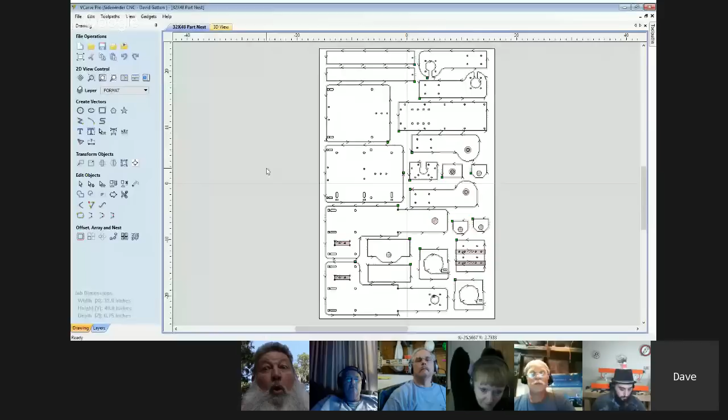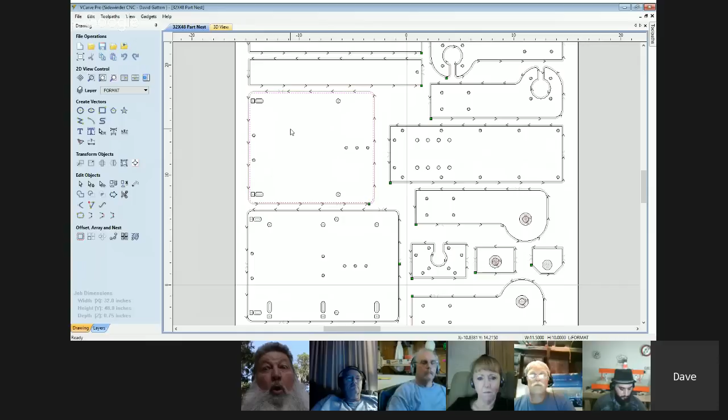This is kind of what I'm talking about. If I can just zoom in here. When something's joined, like if I click on this line, you can see how the whole outside perimeter is highlighted. And if you bring something in here and it's not joined, you'll only get whichever line you're touching on, or maybe just that arc or something like that. So if you're having problems running something and it's cutting on the inside in some places and the outside in other places, more than likely that's what it is. It just hasn't been joined.

Yeah, if I may piggyback on that too, Dave. 99 times out of 100, when you import a DXF file into VCarve Pro, if you import just a rectangle, it's 4 separate lines. It's not a solid rectangle. So you will have to highlight all 4 of those and join them, as Dave was talking about.

Sometimes, not often, but sometimes even circles will be composed of different segments, and you'll have to highlight that entire circle and join it, or convert it to arcs, and that gets a little bit more advanced. But just know that they're treated as separate lines, separate entities, and it's not one solid object.

Exactly. Yeah, I know. Because I draw everything in SolidWorks, and I've trained myself. That's the first thing I do when I bring the DXF into VCarve Pro, is to go through and join everything that I need to join, because it just won't work if you don't.

So. Well, is there a command in there, like that circle is separate arcs, and you highlight the whole circle, or select it, and there's a particular command, like say join, and it joins it at one time? Yeah. Exactly. You guys keep talking, and I'm going to go back here and try to find a DXF that I can bring in. Yeah, it's exactly like that, Russ.

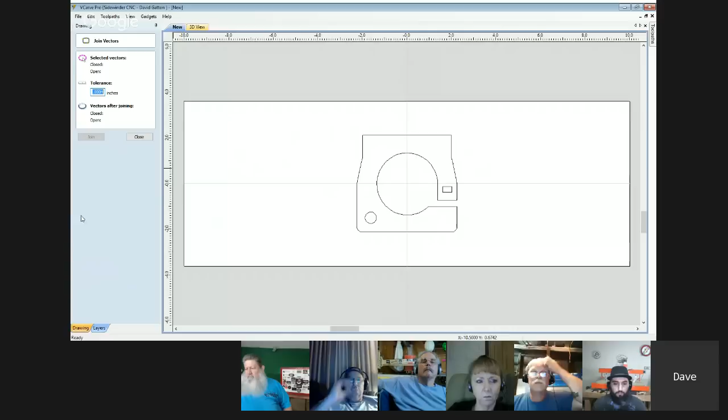And in this case, well, that one's okay. But in this case, you know, it's where I could just click this join thing and just box the whole thing. And then once I hit join, now when I touch any place on that part, the whole thing lights up. But that's what it needs to be in order to put the proper tool path on there. Otherwise, you're going to have some big problems.

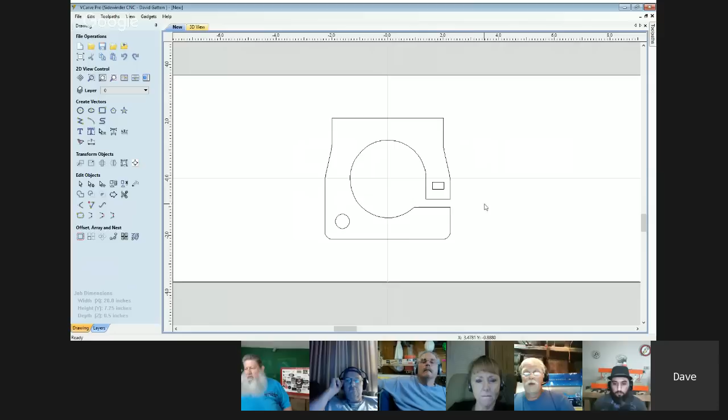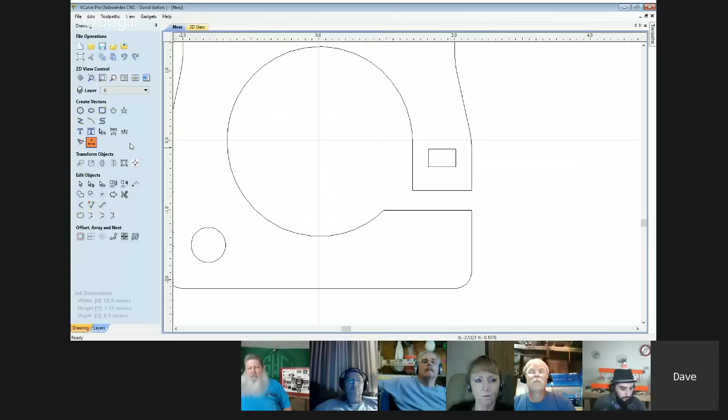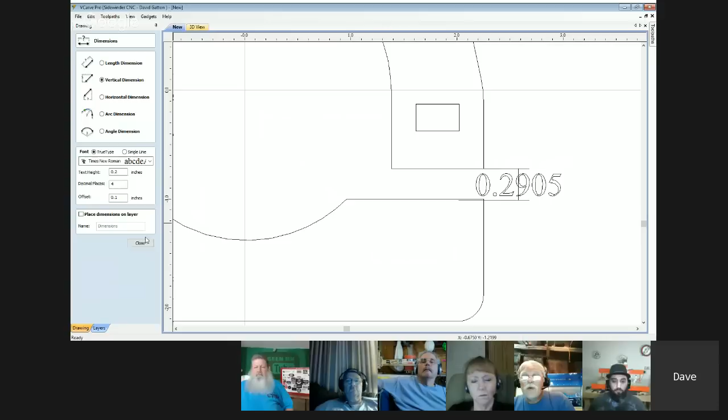And one other thing I might mention, since I brought this part up, is if you're going to cut with a 1/4 inch end mill, this right here needs to be, it doesn't have to be much, only a hair, but it needs to be slightly bigger than a 1/4, or you're going to have some problems there too. I know I've got that set at about 290 or something like that. But if you keep that the same, you run into problems.

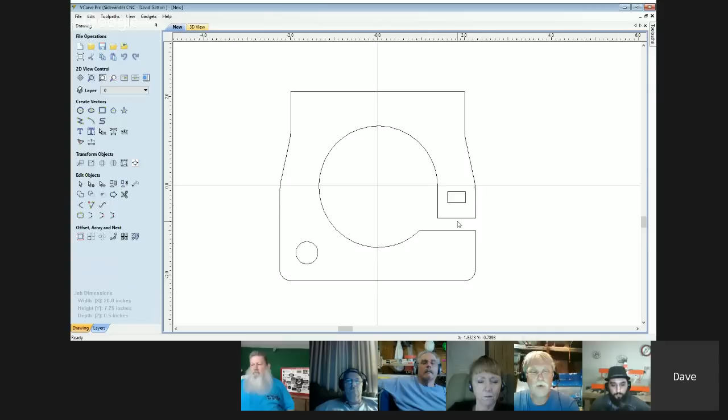And Juan, I don't know if you've run into something like this or not, but if you have it exactly the same width as your tool, it thinks that's already cut, which really it kind of is. But then it doesn't want to cut back over it a second time. But if you fool it and make it just slightly bigger than your tool, it'll go okay when it's doing this side, and then when it's coming around and doing this side, it'll just kind of cut it again. That's correct.

I love it when I'm correct. Okay, I'm going to try to get back here to you guys. Okay.

All right, so we've covered joining. What else we got, Mark? Well, I do have a question here from Andrew. He says he hasn't built his Sidewinder yet. Does it make sense to try out the trial version of VCarve Pro, or is this not sensible yet since I can't carve anything? Well, if you've got your machine built, you can still run a few things with the sample version. Yeah, he doesn't have his machine built yet. He just has the plans.

Oh, okay. Well, still, I don't think it ever hurts to get that demo version as early as you can. That way you can start learning it. Same goes for Mach 3. I would agree. If you're not ready for it yet, go ahead and get it because the downloads are free. Get them and start playing around with them. That way, by the time you get your machine up and running, you maybe got a little handle on the software. I would second that. You cannot start learning this software too early. There's just no such thing.

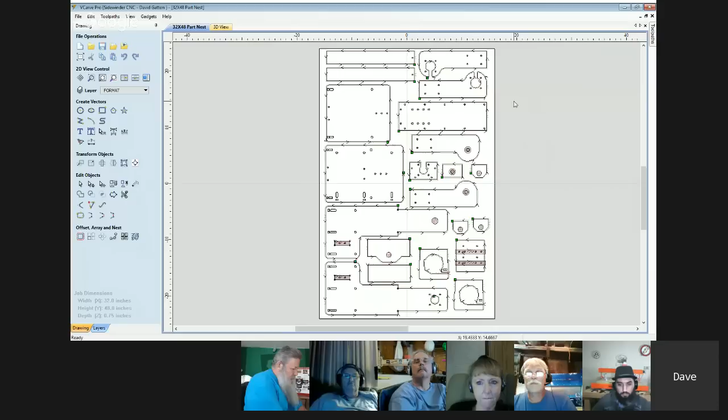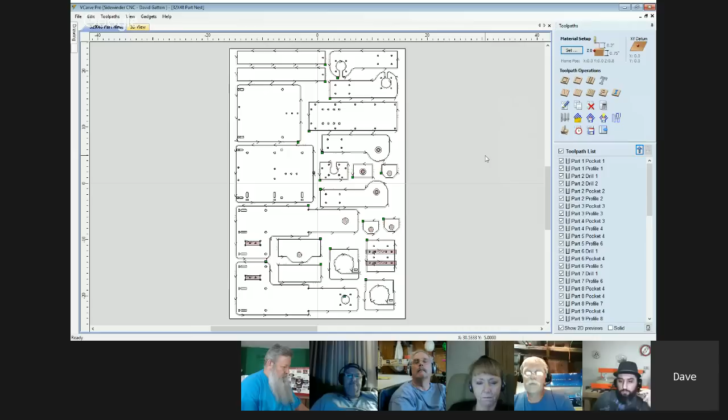Okay, this is a nest that I've been running, and I didn't use the nesting function. I just kind of figured out what my blank size needed to be, how many parts, how many of each part I needed, and just kind of played around with it and tried to figure out how to put them on there. And this isn't necessarily the correct way to do anything. Anytime I show you folks stuff, I'm just showing you how I do it. It doesn't necessarily mean it's the right way or the wrong way. It's just the way I do things.

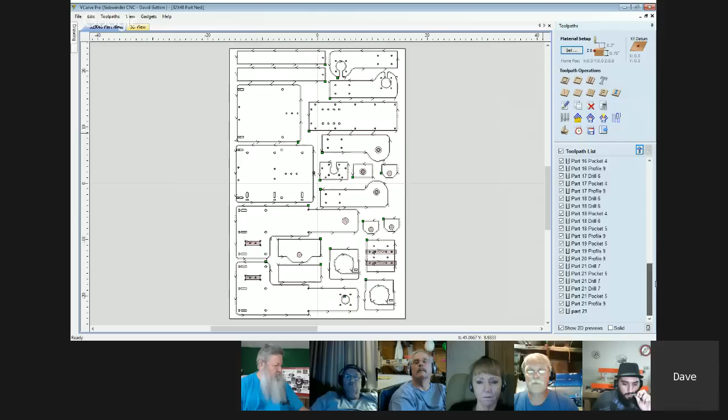And anytime I'm running a big blank like this, maybe you can see up there it says 32 by 48 part nest. So this is a pretty big piece of material. You see over here, I've got a lot of tool paths. But I could have a lot fewer tool paths because every place there's a pocket that's 3/8 deep or whatever, well, I think these are through holes here. But I could do all these pockets in one tool path and do another depth pocket in other tool paths.

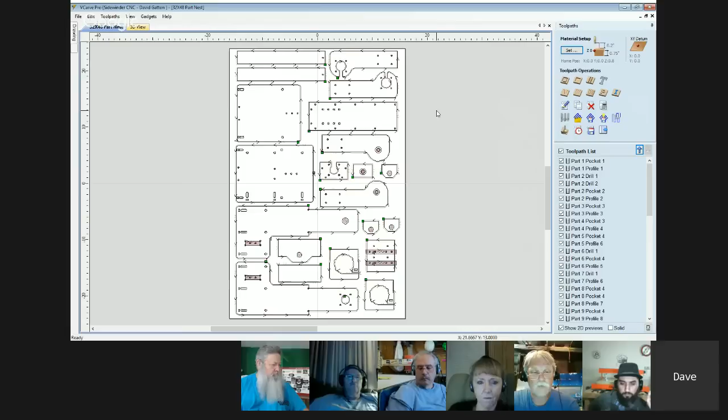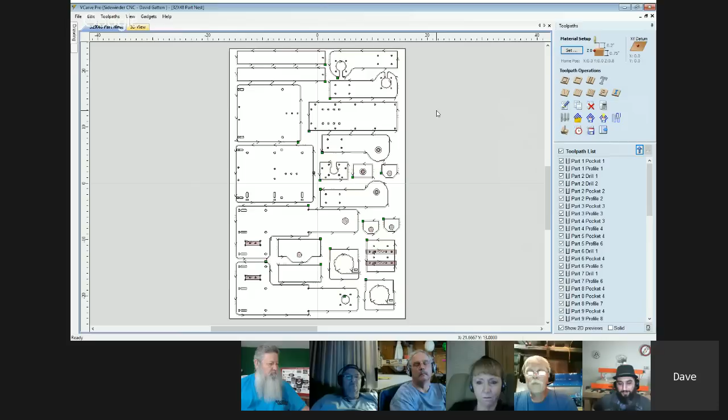But the reason I have so many tool paths is I found that when I do a big blank like this, if for some reason the power flickers for just a second and my machine gets off, if you're just doing holes all over that blank, you may not even realize anything is off until you've run that whole nest. And trust me, that's not the time to find out something's wrong. So the way I've done this nest, you can see part 1, I've got a pocket and a profile. I've got part 2, a drill, pocket, and a profile.

So if I run this through the simulation, and I hate when y'all are quiet, I'm assuming y'all can still see what's going on here. Yep. Okay, thank you, Mark. Somebody say something. We're all muted. Oh, okay. Well, I appreciate that, but I can't see y'all. No, you can see it. If you're nodding your head or something.

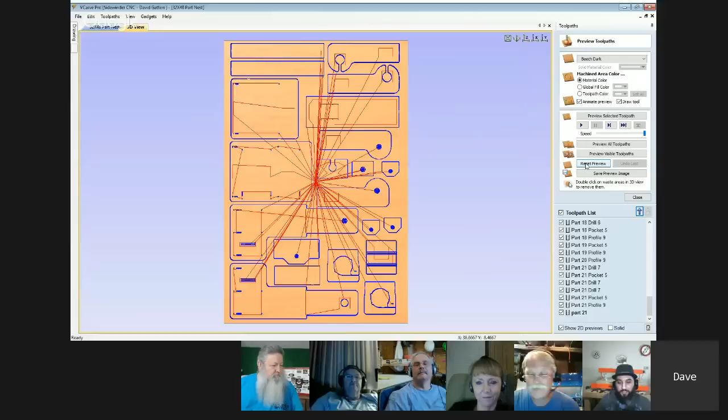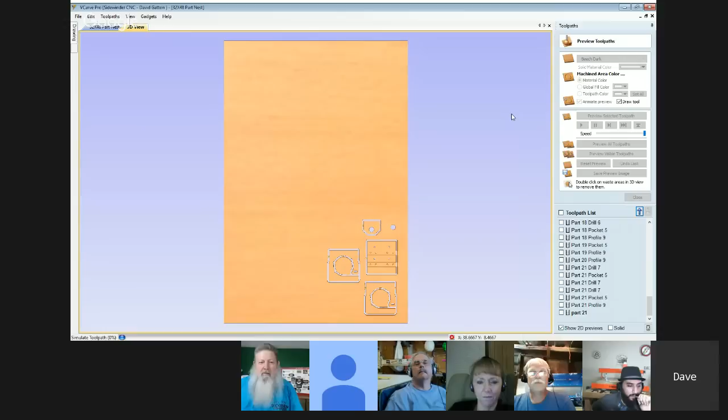So I'm just going to reset the preview, and I'll hit preview all toolpaths, and it's not going to run real fast, so you can get an idea. You can see how I've got mine set up where it's going to do all the different toolpaths it needs for that part, finish that part and then move on to another part. Again, this isn't necessarily the right way or the wrong way. It's just the way I like to do it, because if the power should flicker and something gets off, I can know it before I burn that whole big piece of material. Not only that, you can start wherever you want.

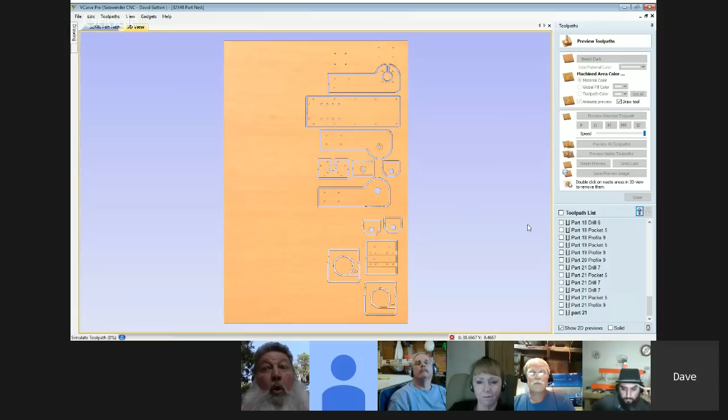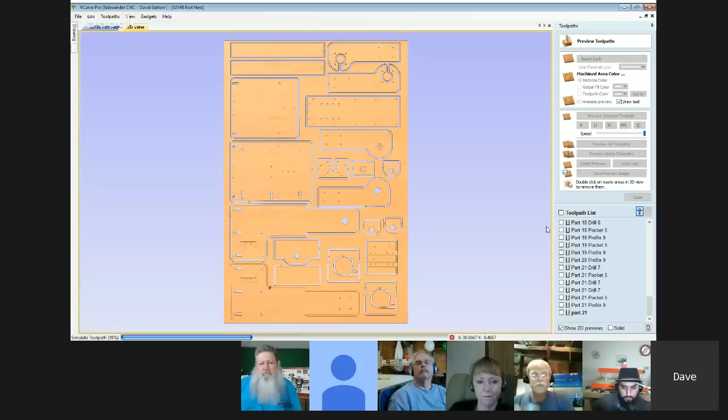Yeah, exactly. And if you look at my toolpath list over there, something people may not realize, you can double click on that toolpath and name it whatever you want. So when I run my G code, and I'll show that in a minute once this gets done, it makes it nice because if I want to find a certain spot in a part in the G code, I can do a search for the part number. I've actually got a printout of this nest, and I numbered them all with my pen, so I know exactly which part I'm looking at.

Okay, got a little question here. When you're talking about nesting, is the overall project nested, or have you nested each individual part so that it will cut it out? Nesting just means putting a group of parts together in one blank. Okay.

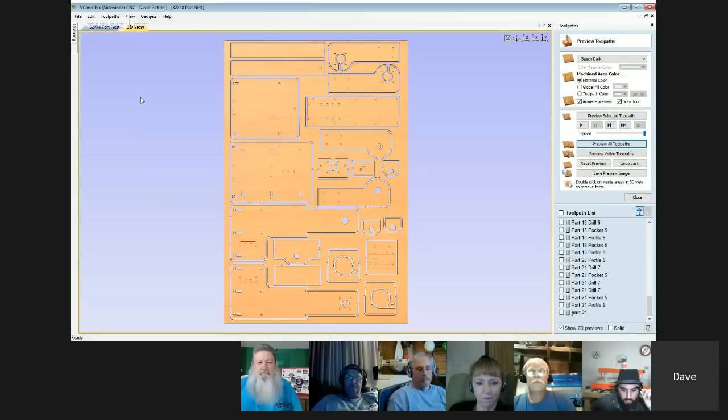I noticed your start points. Did you deliberately put them there, or was that automatic in VCarve? It's all automatic, or I guess that's the way I had it set up. I didn't set them. Yeah, there's a check mark in your toolpath, and it remembers your last setting. So if you checked use vector start points at any time, that's how it's going to open the next time you use it. Okay. I usually move mine around.

That's why I'm saying, because they look like those were real good spots to start and stop at, or to actually start your... Oh, okay. Well, if it was, it was just luck, because I didn't really plan any of that. I mean, I know you can move all that stuff, but I usually don't bother. I usually just let it start wherever it wants to. I hear you. Yeah.

Sometimes it makes sense if you have certain projects. You'll want your bit to start at one corner and work its way in one direction, and you can kind of line up all your start points on each one of the vectors to go in sequence. Other times you might want it to just finish up with this part over in this corner, pick up and move over to the next closest part. It doesn't come back down to the very foot and start over again. It's entirely up to you.

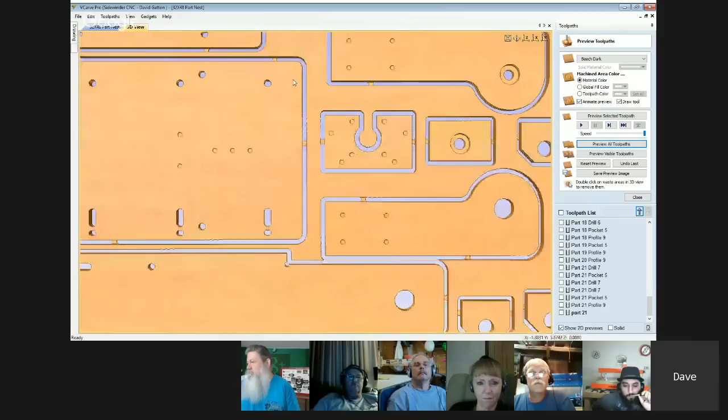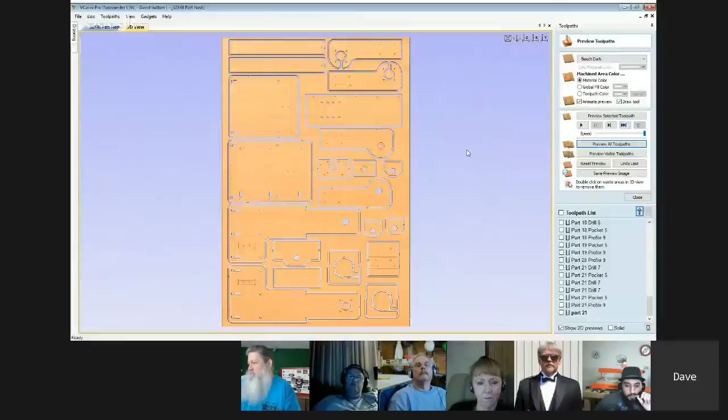Yeah. And I guess I'll zoom in here so y'all can see that I've got tabs here holding all these parts in. And one thing I'll mention about tabs, I've always done this with sheet metal too. A lot of times, if you've got a bunch of little parts and you've just got one tab on it and you're using a lead-in tab, it's good to put it in the same place every time, because that way you can take those parts, whether it's metal or in this case wood, take a stack of them, put them on a sander and sand that off real easy.

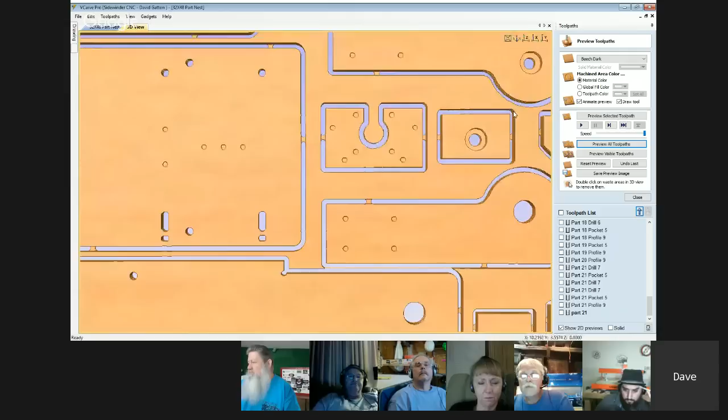And one thing I also do, if you'll notice, I do pick the location for these tabs, and I always try to avoid putting one, well, if I can get the thing over here, here we go. Try to avoid putting it on a curved surface or something like that, because that's a whole lot harder to sand off, or at least I think it is. Right, exactly. And I do the same thing. When I was using tabs, I would put them right in the middle of a nice straight piece.

And another quick tip: on your tabs tab over in your toolpath, you have a check block for make 3D tabs. What that does is, instead of the bit running up to where the tab's going to be, stopping, lifting up, moving over, and then plunging back down, the bit actually ramps its way up and then ramps its way back down, so it never stops moving in that axis. It just speeds it up a little bit.

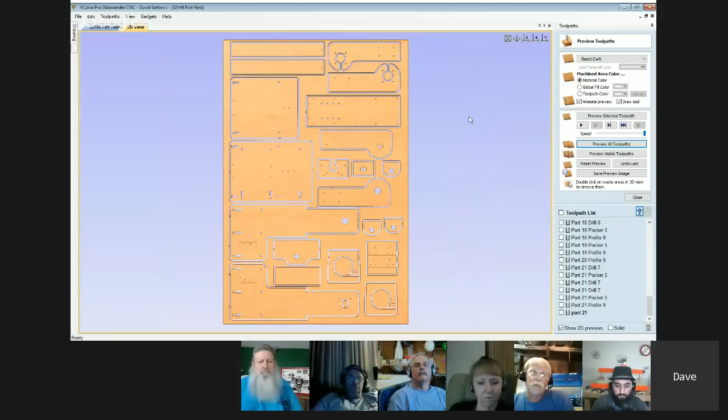It doesn't really matter if you're cutting out one part, but if you're cutting out 15 or 16, like on this nest right here, that might be 10 minutes just in creating tabs alone. Yeah, and that's a good point, Mark, because as I ran this today, I realized that I didn't have that checked, so it was stopping and going up. So I probably can tweak this a little bit and save some time by changing that.

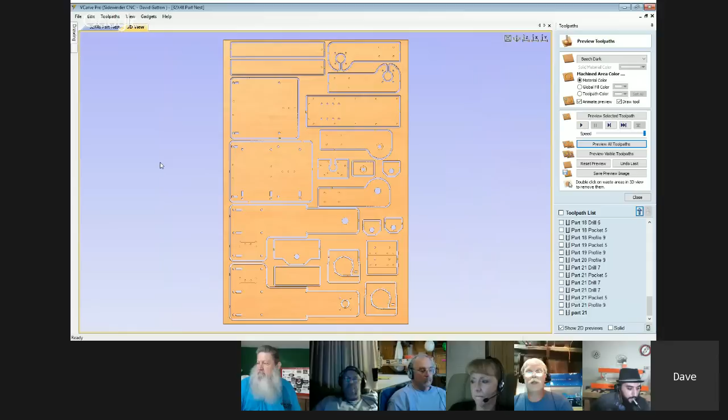Have we got any other questions over there in the chat, Mark? Yes, sir, we do, and this will dovetail into what you're talking about. Nathan Longfellow wants to know, is there a way to merge toolpaths? What exactly does he mean by merged? Well, I would guess, for instance, all of your profiles on that nest. Do you have all of your profiles merged into one toolpath so that it cuts all that out at once when it creates your G-code?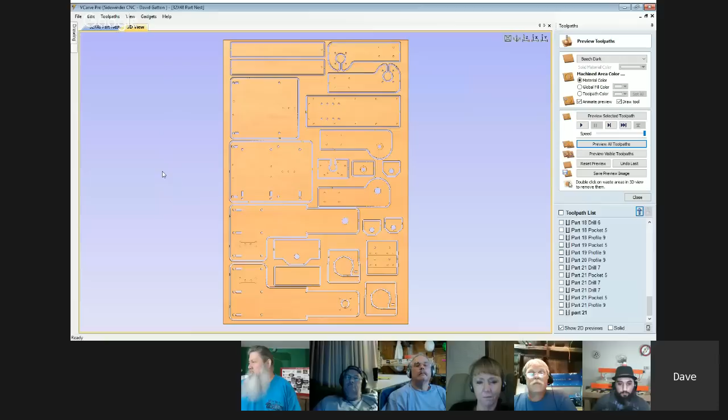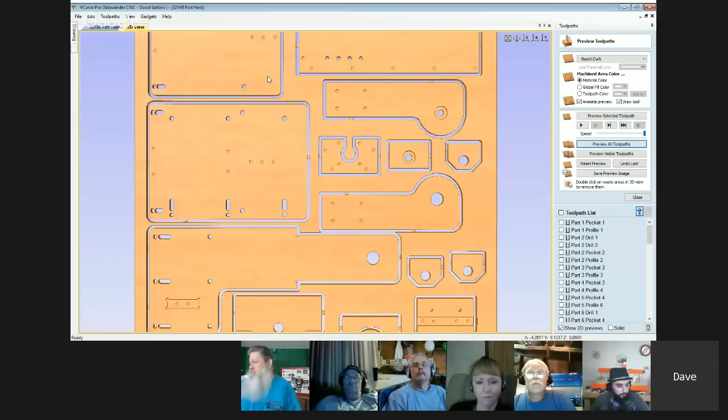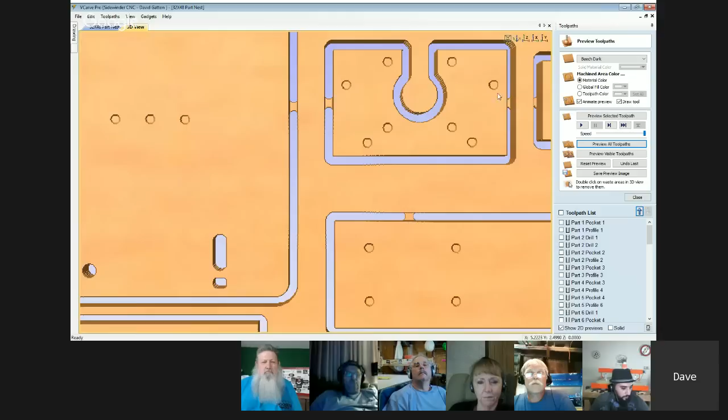Well, okay. I'm not sure. Maybe he'll throw something out there to let us know for sure what he's talking about. But I'm gonna go ahead and tell some stuff, and if that's not what he means, he can get with us. All these different toolpaths here, and I think I mentioned this last week, you see these little marks. I'm using a 1/4 inch down spiral for this whole nest. Every toolpath over here is using that. Now, these are just to mark suggested pilot hole locations for drilling your pilot hole for your wood screw and stuff like that.

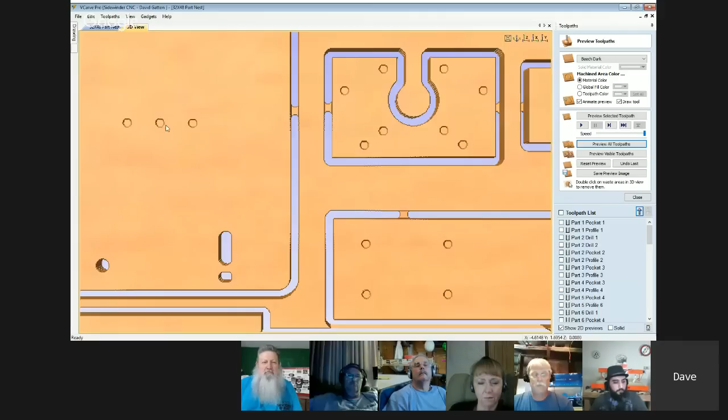Obviously, when you drill your pilot hole, you're not going to be drilling a 1/4 inch, but this is just to mark the location. So all these little things I'm pointing at with the mouse here, I'm just telling it to go down about a 1/16 just to mark the hole location. That's all that's for.

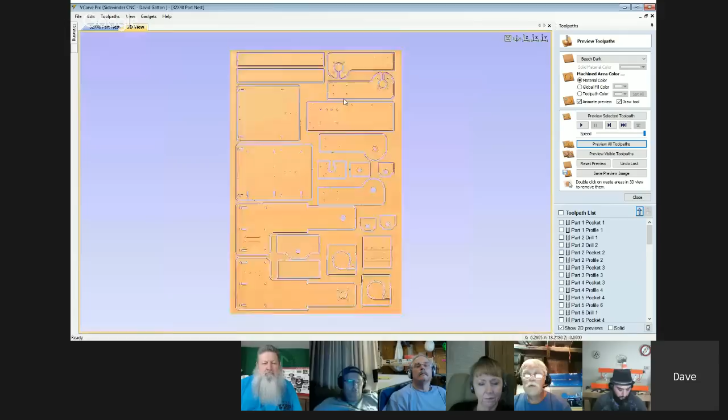Everything else, and you can see there are some fairly large holes here, I guess, but everything is done with a 1/4 inch end mill, and I did it on purpose just so I didn't have to stop and change tools and reset to 0 and all that.

For something like this, you get a long run like this, you can hit the button and watch it a second or two and then go do something else, and that's what I do. I was working on something totally different while this was running. I'd stop every once in a while and go over there and turn on the shop vac and clean up the mess as I went, because I wasn't running any kind of dust shoe or anything with this. I was just letting the chips fly where they may.

But I'm not sure, Mark, has he come back with anything? Is that kind of what he was talking about, or is he talking about merging tool paths with two different tools? No, he says he thinks he's got it now after you talked about saving the G code for the two paths. And he has said he's always saved them separately, each tool path separately, even if it uses the same bit. But he wanted to know if you could merge them so that they all end up on the same piece of G code. Yeah, and I can do it right here.

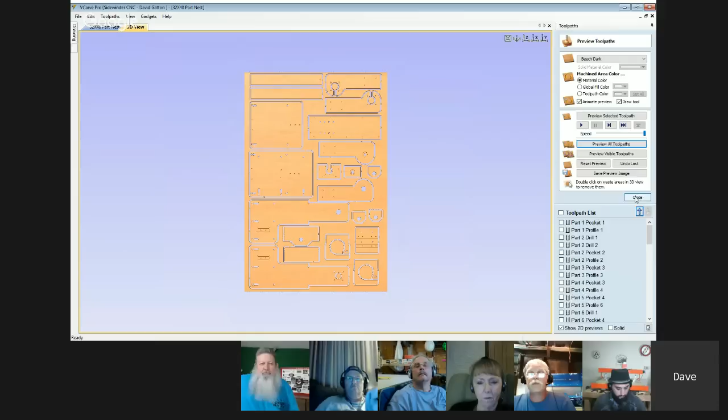Really, the way you do it is when you go to save this, since these are all the same tool, all I got to do is check that, and you can see it highlights all the tool paths. And if I run this back and forth, you can see that every single one of them has a check mark by it. So now when I select this, it's going to list them here, and you can see they're all right there because they're all using that same tool. So it'll all just be one big program.

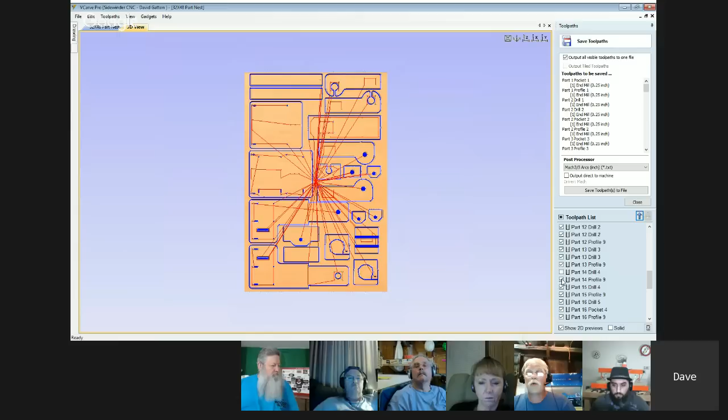Now, let's say, for example, I didn't want to cut these two parts here, and I'm picking those two parts because I just happen to know that they're 14 and 15. I can turn these off, 14 and 15. So you see now the tool path isn't highlighted there. So now if I save that program, it's going to run all the parts except those two. So you put all your tool paths over here, but really when you go to save your G code, whatever you have checked is what it's going to put in the thing.

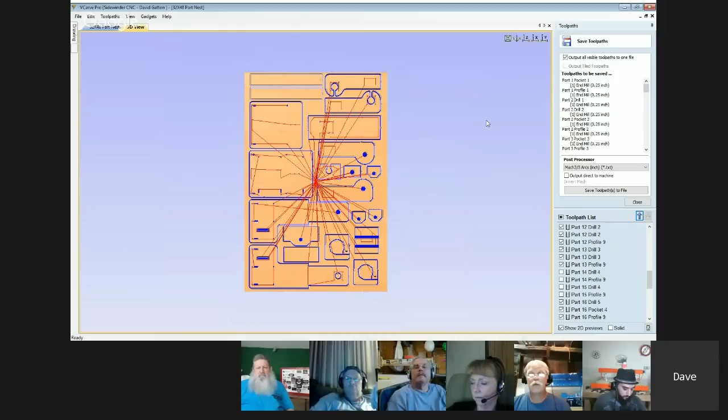And you can also put tool paths together that don't necessarily have the same tool. Like say here I've got a 1/4 inch end mill. Let's say I had a 90-degree V-bit or something. I could put that in there too. It's just that I would have to make sure I had a stop in the program somewhere where I'd have to change it out. And to me, it's easier if I've got different tools, I always save them as different files. I do the same. Yeah, I just think it's easier. But again, in this case, everything here can be cut with a 1/4 inch end mill.

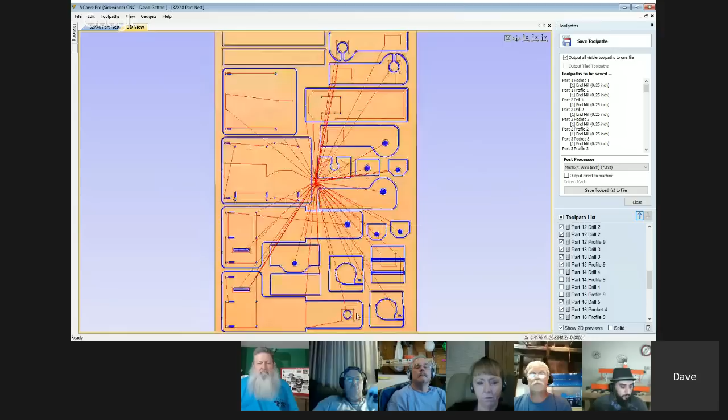Probably the worst thing is, if I can get this stupid thing to go here. Here I've got a fairly large hole, and I could have used a pocket to do that, but using a 1/4 inch end mill, trying to pocket something that big takes a lot longer, so it's easier and faster to do it here, and then I just put a couple of tabs in there to hold it. Okay. And I'm not putting much of a tab. I think the tabs I was using were like 1/8 by 1/8 or something.

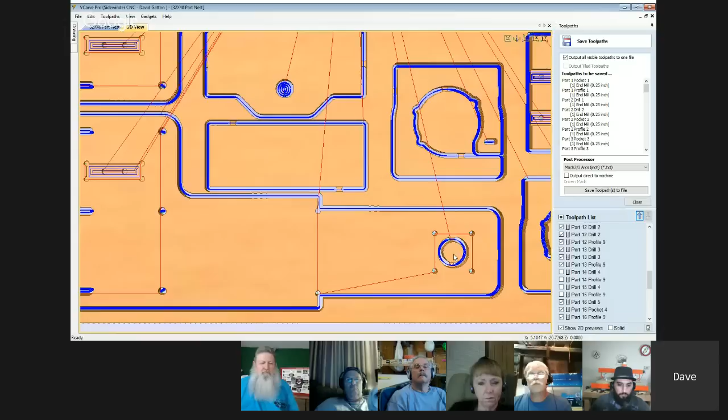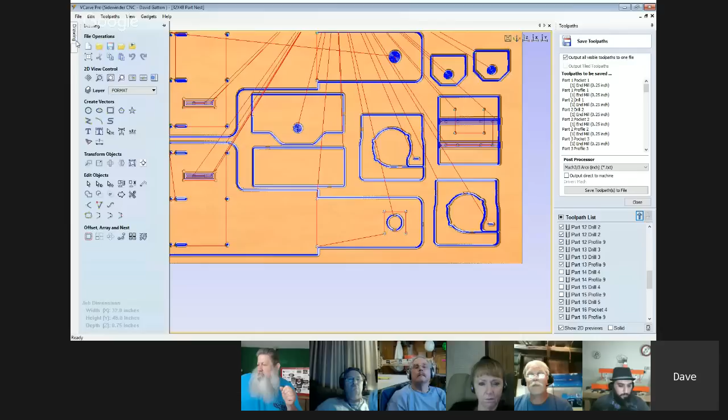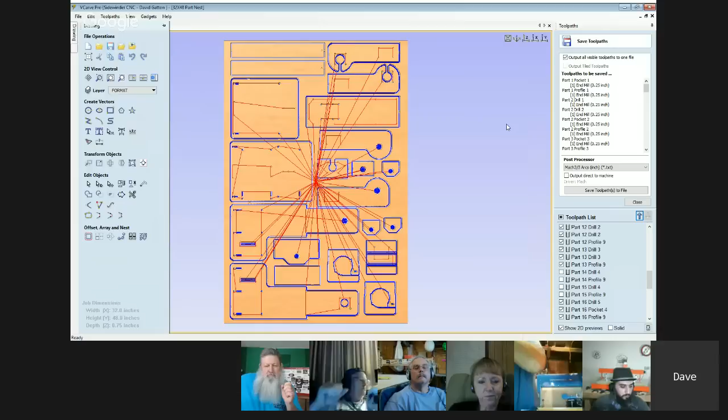Okay, I cut one today, and I used the GarageWorks CNC to cut it, and I used the Porter Cable 690, which is a 1 3/4 horsepower, and I cut it at 80 inches a minute, and I think the depth of cut, I believe I had at 80 thousandths too. And again, I like to run my stuff fairly light, just so I don't have to worry about it. I can hit the button and go do something else and feel confident that I'm not going to bog anything down or break a bit or anything like that.

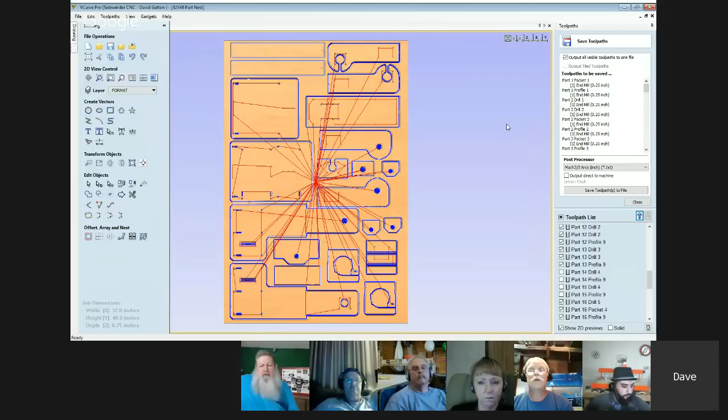And I think it took, I didn't really get a good accurate time because I did stop it a couple of times to check some stuff and vacuum. But I think it's probably going to take about an hour and a half, 2 hours, something like that. Now, I'm hoping that when I get my other table finished and I use that Porter Cable 7518, which is like 3 1/4 horse, I should be able to cut that cycle time down considerably because I'll be able to go probably faster as well as a good bit deeper when I run that.

Okay. I got a question for you, Dave. Okay, go ahead, Russ. Now, when you're talking about setting up a program to cut everything, and then you need to change the tool, can you set it up so that it will go through and cut everything? Let's say I have 3 tools, A, B, and C. Can you set it up so that it will cut everything that tool A needs to cut, and then come back and switch to tool B, then it cuts everything that tool B needs to cut, and then you change to tool C, and it cuts everything that tool C needs to cut? Is that the way you could do it on a CNC?

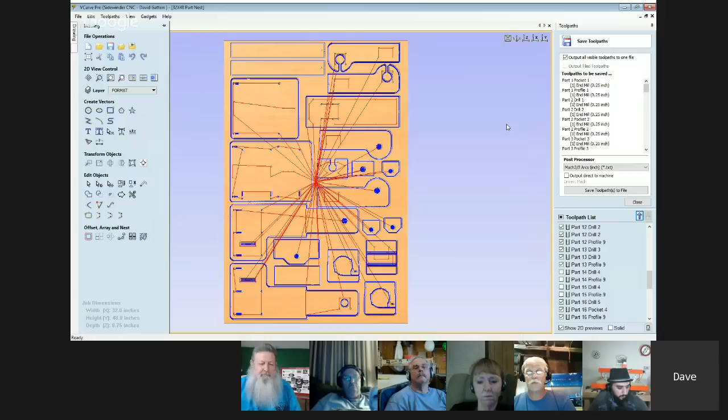Yeah, pretty much in most cases you could do that. It would kind of depend on the tools and what the part is, because some things need to be done before other things. I kind of get what you're saying, but my point is you could actually program it to do that, where you didn't have to flip-flop back. It just comes back and you change the tool only one time. Oh yeah. Anytime I run something where I have tool changes, I still try to make it where I'm only changing it one time. Okay.

I don't want to use a 1/4 inch end mill and then go back and use a couple other tools and then have to come back with that 1/4 inch end mill or something. Right. I like to try to be as efficient as possible on stuff like that. Right. I get what you're saying, because it could be possible that you have to do several flip-flops in between tools depending on what you're trying to cut out.

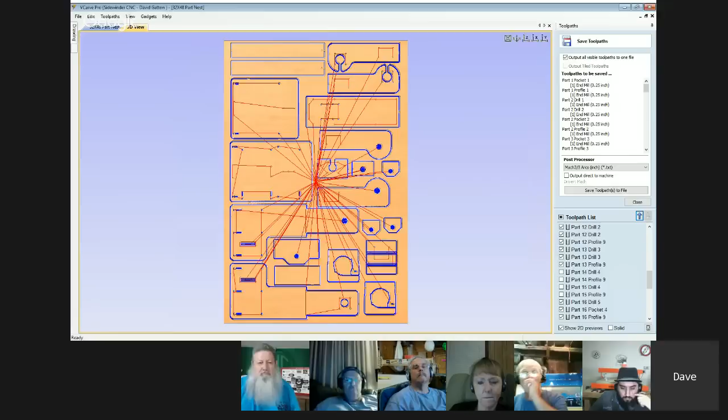Right. I'm gonna try. I don't know. Y'all still seeing the VCarve Pro thing? Yes, we are. Okay. I'm gonna try to go open it up, if I can find it here. Bear with me a second, folks.

Okay. I'll throw this question out to everybody on the panel that uses VCarve Pro. How closely do the VCarve Pro cutting time estimates match reality for you? It's been my experience that the time estimates in VCarve Pro are right around double what they actually end up cutting at. How about y'all? I don't even pay attention to that.

Okay, am I back now? Yep, we got you. Okay, I'm gonna go back and screen share again and show the actual G code here in just a second.

I really think it depends on how you have your tool library set up, because when you set up a tool, you set your defaults for what feed rate you want it to cut at, what plunge rate you want it to cut at, and all that. And then of course that estimate has the rapids too. So it really depends on how accurately you set that up, how close it will be on your time. I've actually had them come out fairly close, but most of the time mine are not close at all.

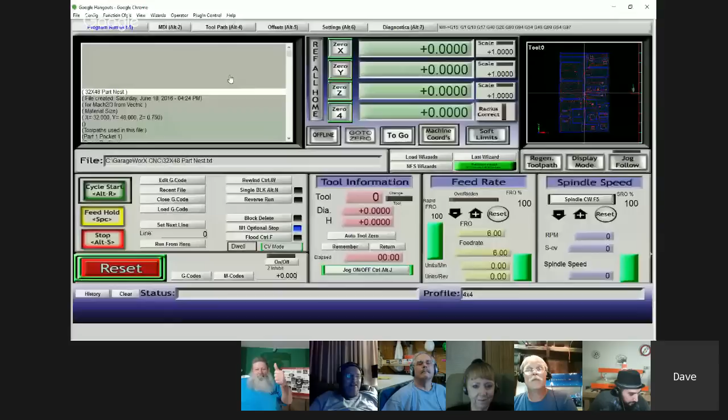True. I'm going to do a video on this controller one of these days. Hey, I have an Xbox sitting over here. I got one right there. I have a 360 controller and don't even use it. You're all set. Okay, Russ, just for you, I'm going to screen share, if I can get this to work. Here we go. Now you got to get a CNC to use with that controller. Yeah, I do. Okay, can y'all see my screen?

Yes. Okay, this button right here is what he's talking about, Russ. This is kind of like a pause button. If I've already zeroed this out, and you can see I'm doing it from the center of the blank here. But at any point I can hit this. What I always try to do is watch the Z. This thing runs slow on this. It's moving over to the part to start cutting, slowly going down to the Z at 200 thousandths there. There we go.

But anyway, as you're running, right now it's negative, so I'll wait, and I can see my Z right here, right where my arrow is. You can see as that goes up. Of course, I don't ever look at this, I'm watching the actual machine. So whenever it raises up, I always try to stop it when it's up.

So if you want to quit for the night or whatever, you can come right here, hit that, record this number right here, which is N980. Like I said, this won't work on everybody's machine. You're right on that, line 98, right next to the stop button. It tells you what line you're on. It's showing down here too. So in my case, I would turn the router off and let it spin down, and then I would hit this go to 0.

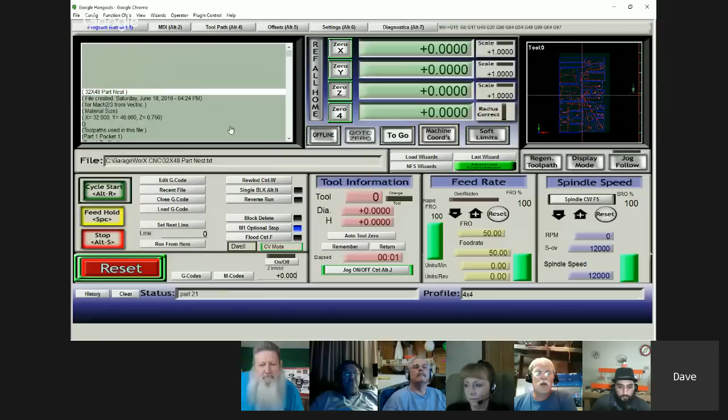Well, of course. But anyway, that's basically what you do: you scroll back down to that line, raise your Z up, turn the router on, hit cycle start, and it would take right off where you left off. I have a video on that, Russ. I think you might have touched on that when you did the spotlight a couple of weeks ago. Yeah, I also have one on my channel. Yeah, he does have one on his channel. That's where I learned that stuff. All right, I'll take a look at that too.

Yeah, like I said, that doesn't work with every machine. It just depends on how the machine's set up. But the way I use lead screws and stuff, you can do it all the time, and it's not a problem. I said, you haven't learned yet, Dave, that if it's going to mess up, it's going to do it live? I know. That's true, apparently. I don't know why that thing got hung up or something. I guess because I got so much stuff going on here.

Okay, and to dovetail in here, Jerry Bonifield had asked, can Dave explain how to start and stop a long cutting run? I've watched the video, but it never worked, so maybe he can explain it with his program. I think you just did, didn't you? Did that answer your question there, Jerry? That's what we were just doing. Okay. And again, I don't want somebody to try that and they're not using the machine like I'm talking about, because it may not work.

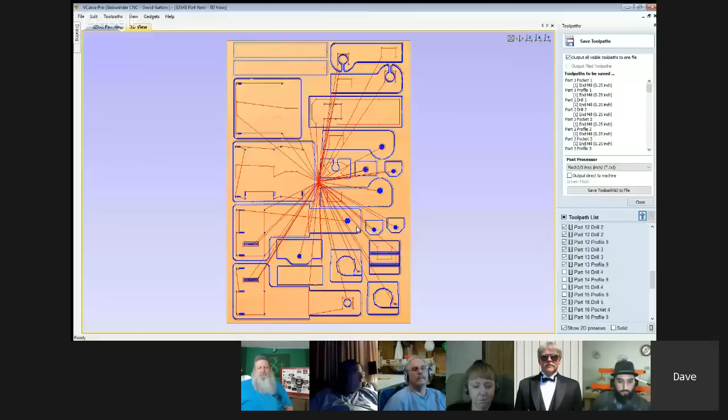That's why I love that triple edge finder, because even if everything goes wrong, so long as that part is still mounted to the table, I can come back and reset all my zeros and pick up right where I left off. Okay, can y'all see this again? Yeah. Okay, I'm gonna zoom in here.

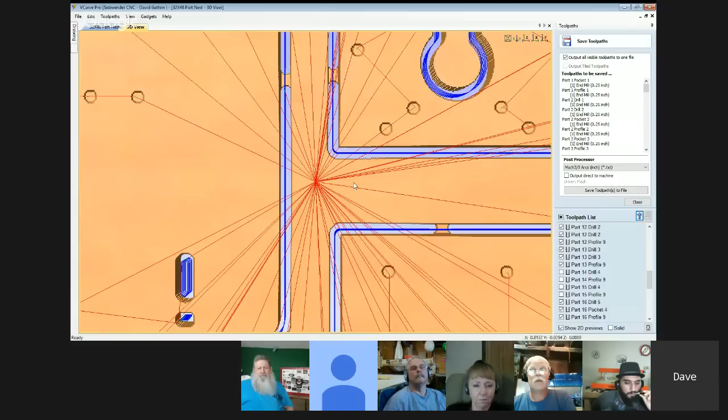You can see that I'm starting in the center of the material, and you notice that right where the center of the material is, it's in the skeleton part. It's not on a part. So what I could do when I set my zero, my reference, is what Richard was talking about: plunge down a little bit and put just a little bit of a hole right there, then come back up and start running the program. Then if anything happened, I could go back to that hole, line it up, and not lose all those parts.

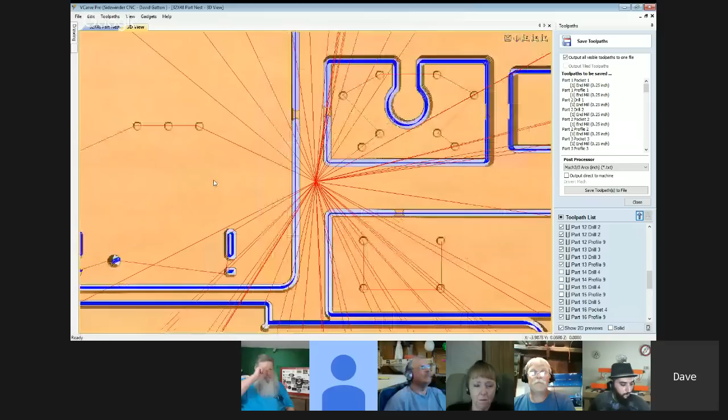Yeah, you recover. The other thing is that if you drill two holes in your table before you set your material down, you can turn the part over and reference all your material to the second side. Yep.

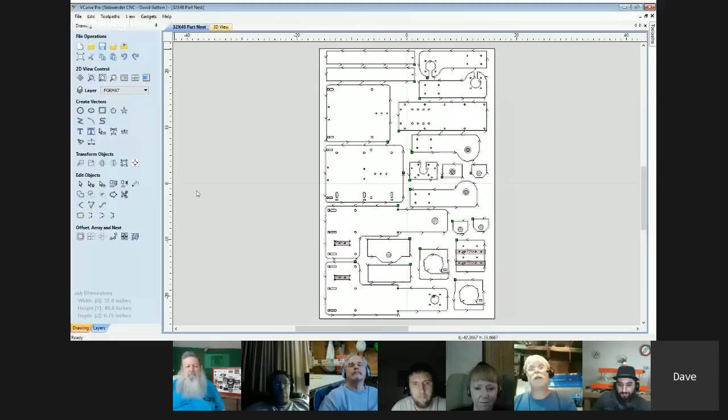Rick, I hate that it doesn't show that. It's really very simple. You just go to that tool database, and it's got imperial tools at the top, metric tools near the bottom, and then there's different categories: end mills, ball nose, V-bits, form tools, engraving, specialists like a diamond drag, and drills as well. You just click on one of those categories, and hit new.

I know you guys can't see this, but you hit new, and then it asks you for the tool type. So I can drop that list down and say, okay, I'm going to do a V-bit, and then you just put in the information about that tool.

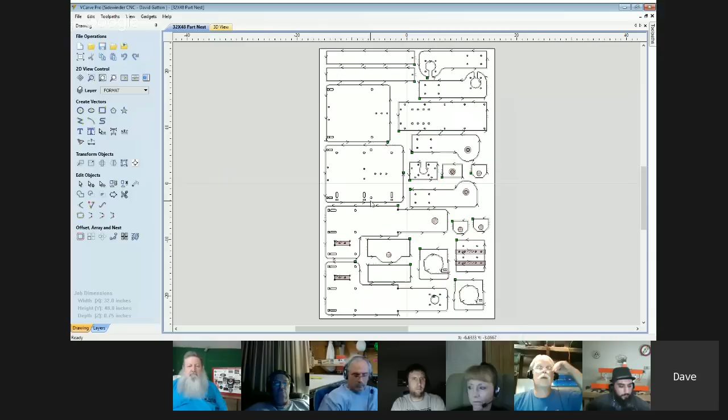It asks for the geometry, the diameter, the included angle, and then here's where you set your defaults on your cutting parameters: pass depth, final pass step over, clearance pass step over, feeds and speeds. You can set the default feed rate, and you can also give it a tool number if you want to. I apologize that this won't let me screen share all of that. Am I back there? Okay.

And one last question from Jim Sinicola, a personal preference question: when it comes to router bits, upcut or downcut? That's not going to start a debate, is it? It depends on what you're trying to do, what kind of finish you want on it. I use both.

Sometimes I use just a regular old straight cutter. I use a bunch of different things. It really depends on what kind of finish I'm trying to get. But from personal experience, if you're looking for a clean pocket, downcut is the way to go. Yeah, downcut is what I used today running that nest I showed earlier, for pockets and most profiles.

It also has to do with the project you're working on. If the face you're milling is going to be hidden, on the inside of something, or painted, then you can use an upcut bit. If the good exposed side is against the table, I would probably use an upcut, because you're going to want that to be the show side.